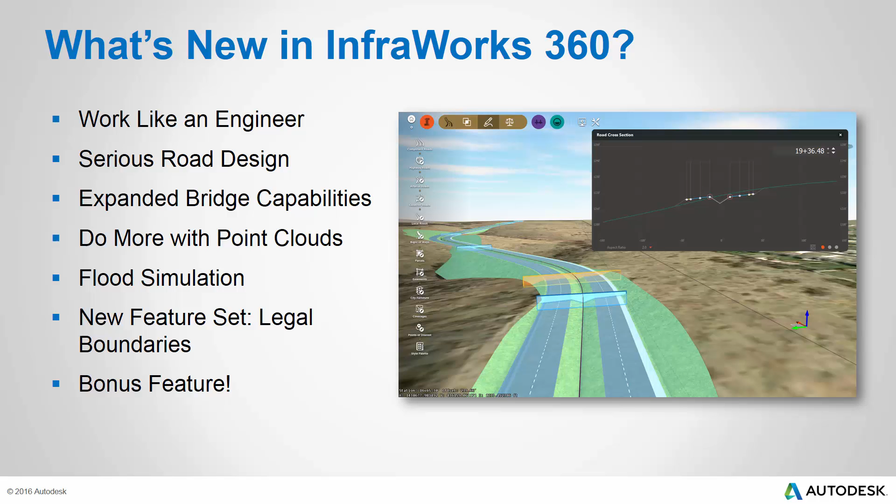Let's jump into how this new release of InfraWorks 360 lets you work like an engineer more than ever before. The newly released views allow you to easily control what you see and how you see it. Out of the box, the software comes with two built-in views: conceptual and engineering.

You can see how these samples are built so that the conceptual view is much more visually stunning with real materials and animated clouds, whereas the engineering view is more simplistic and turns on features like surface opacity so I can see beneath the ground to the bridge substructure.

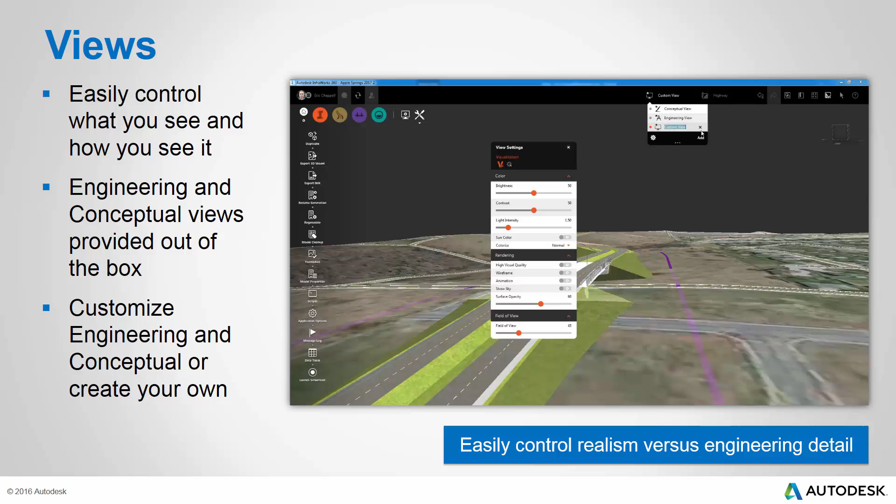Now I can completely customize these two views, and I can even add my own. For example, I can create one called wireframe and simply turn on the wireframe capability, and now I'm able to switch between three different views: conceptual, engineering, and wireframe.

Why is this feature important? It lets you easily control the realism of what you see versus the engineering detail you see at any given time.

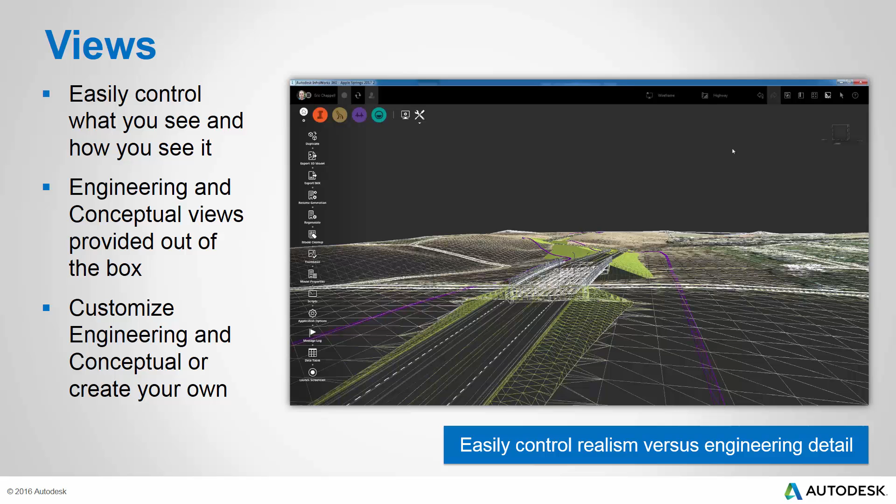With the new release of InfraWorks 360, showing contours is as easy as flipping a switch. When I click this area of interest and turn on the contour display, I immediately see the contours, and they reflect not only the GIS data representing my terrain, but also the design road cutting through it. They are, of course, dynamic.

If I make a change to the design of the road, for example lowering this PVI to change its elevation, I see that change reflected in the contours. I can also affect the interval of the contours. Currently they're set to 2 feet. I'll change them to 1, and just like that we see the new interval represented on screen.

Why is this feature important? It allows you to see the engineering detail in your design in the form of contours.

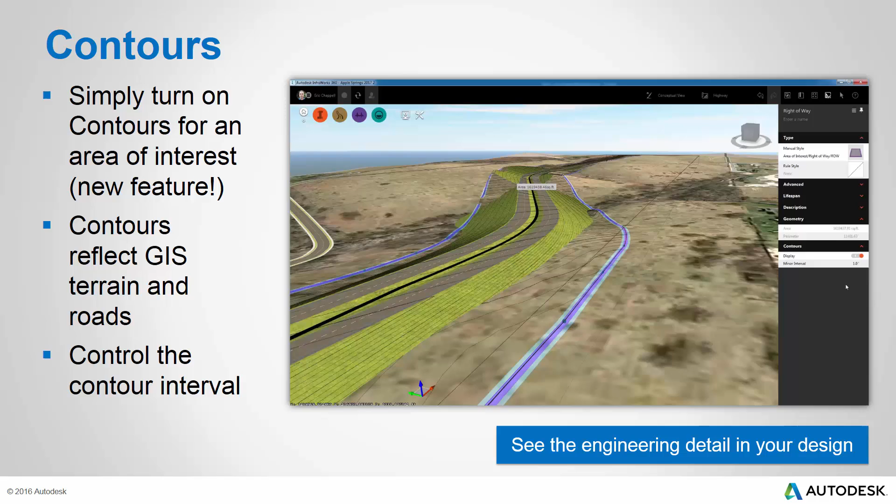With the new release of InfraWorks 360, you can easily view the cross-section of your road design. You can change the position where the cross-section is being viewed, and you can also pan and zoom within the cross-section window. The window itself has several different views, including super elevation view, road assembly view, and cut and fill view.

Here you can see as I move the slider from an area of cut to an area of fill, the section view window is providing information about the amount of cut or fill at any given point. You can also control the aspect ratio.

Why is this feature important? It allows you to see the engineering detail of your design in cross-section form.

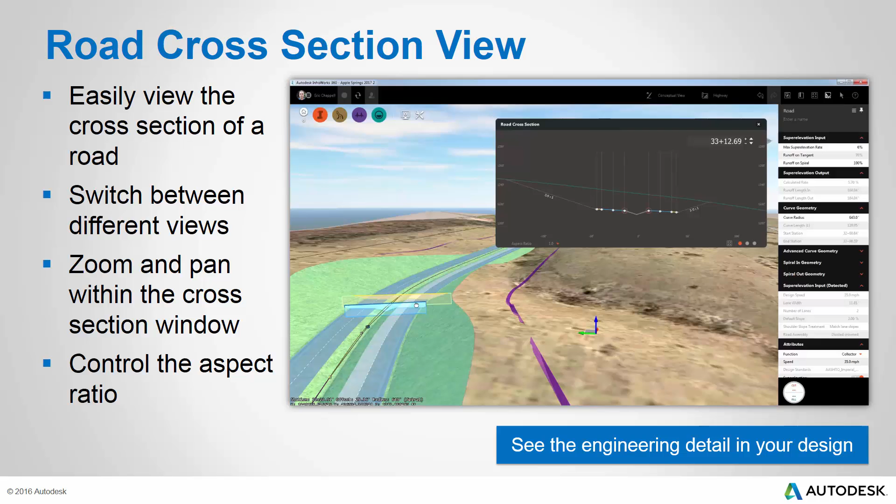With the new release of InfraWorks 360, you can calculate earthwork quantities at the click of a button. With a conveniently located earthwork quantity calculator in the bottom right corner of my screen, I can easily get cut and fill values for this road.

If I want to see detailed values, I can bring them up on screen, or I can export them to a report. Settings allow me to control the station increment and whether or not sampling takes place at key stations.

And of course, if I make a change to the road, it's very easy to recalculate my cut and fill quantities, so I can easily work toward achieving a balance or whatever my earthwork quantity goals are.

Why is this important? It allows me to easily assess the cost impact of my design as I work.

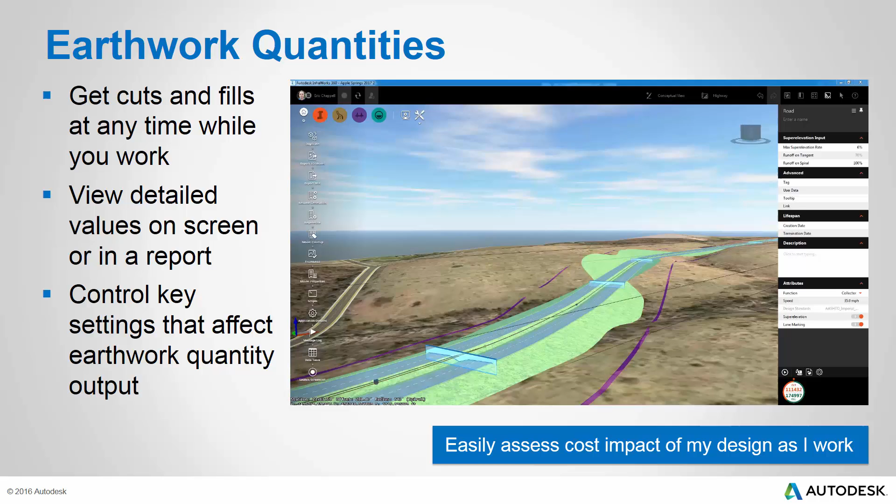With the new release of InfraWorks 360, you can easily configure the units that are applied when you get important information from your model. You can control the unit and precision for many types of values.

Notice how each value in the model is respecting the unit and precision settings that I adjusted just a moment ago in the unit configuration dialog.

You can easily switch between imperial and metric, and your configuration is stored for each unit system. This is important because it allows you to get each value you need in a practical and efficient form.

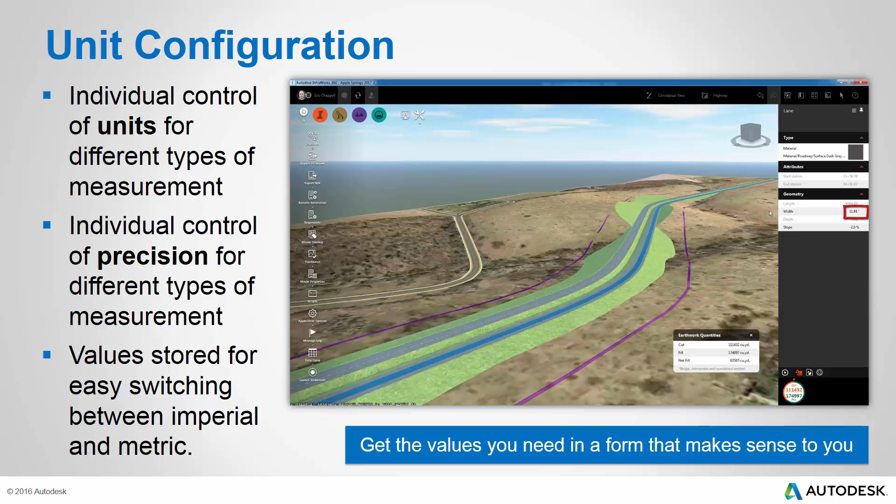Now let's take a look at how this new release of InfraWorks 360 allows you to do some serious road design. You can build roads using smart components like lanes, curbs, and sidewalks. Each of these components can be configured independently, as is being done with the sidewalk in the current example.

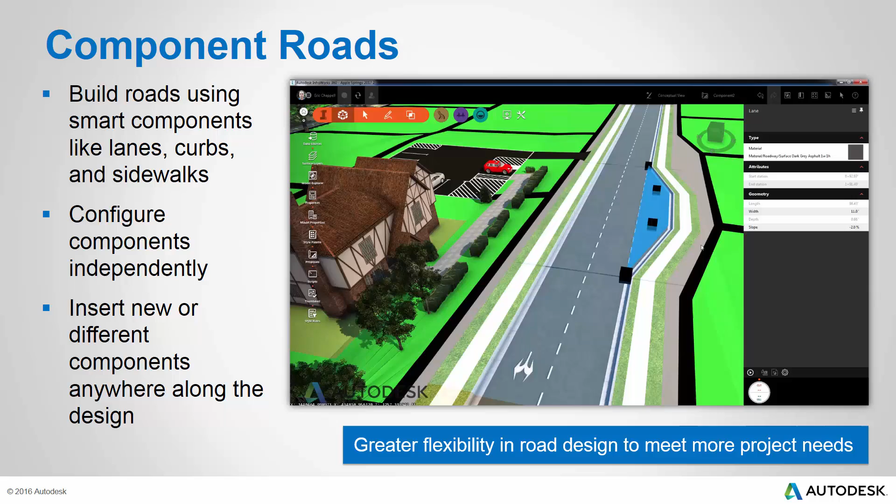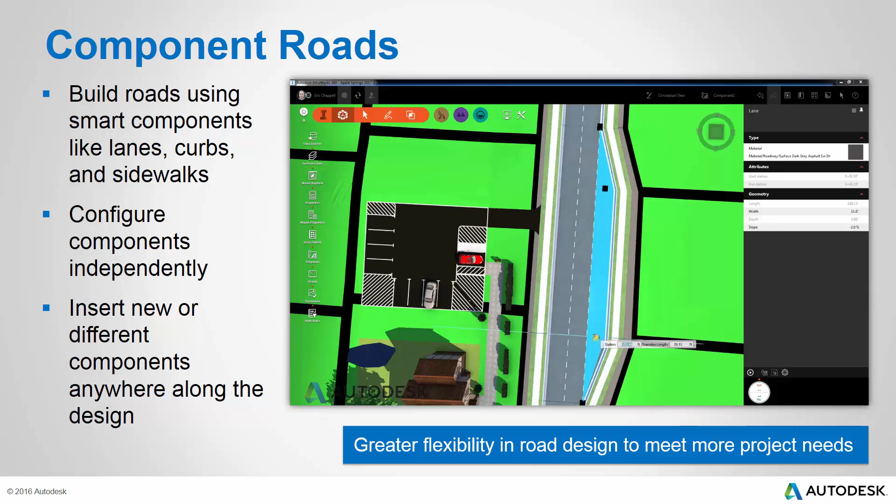You can also insert new or different components anywhere along the design. Watch as we insert a new lane component to create a bus pull-off to serve our residential development. Not only can we add the extra lane, but we can also configure its geometry and other properties to fit our project. We add a bus for a little bit of realism, and just like that we've got a modification to our design that includes the bus pull-off.

Why is this important? It allows you greater flexibility in your road design to meet more project needs.

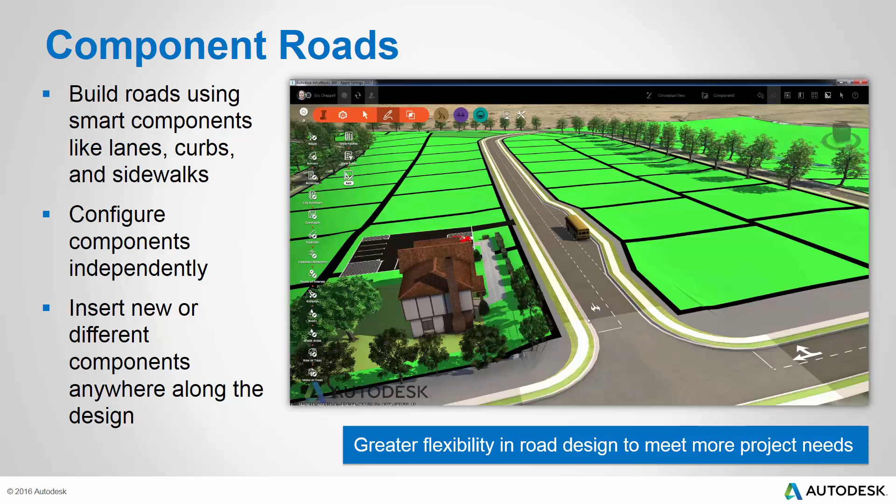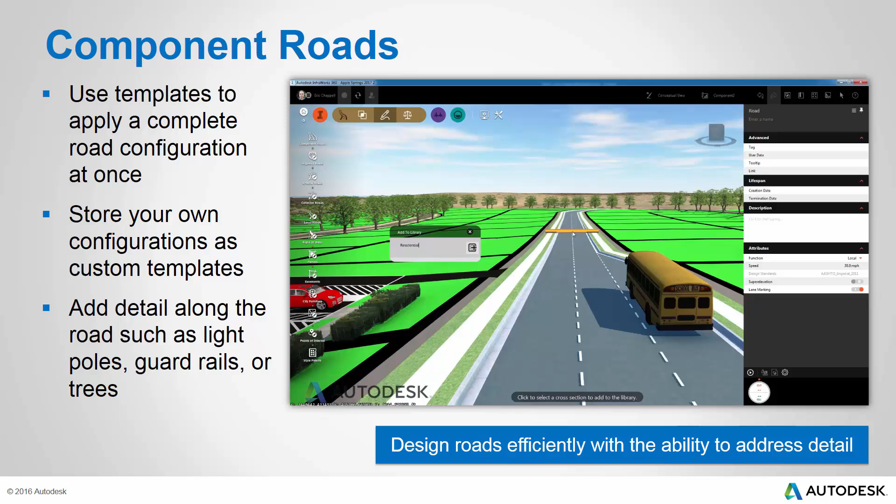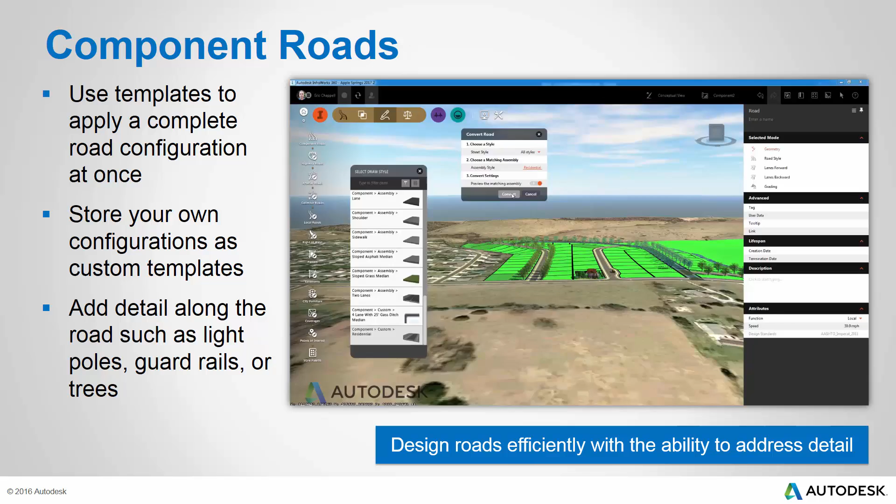Let's take a look at some other things you can do with component roads. You can use templates to apply a complete road configuration at once. Watch as we take the current road configuration and store it as a template in the library, then apply it to another road in the same project. We do this by converting the style-based road to a component road and choosing the component road template we'd like to apply. In just a few seconds, we've converted this road to a component road, and it also has the components and configuration of the road we were designing just a few minutes ago.

Next, we'll take this road and add some detail by providing trees along the right side. Note this could be anything - trees, obviously, but also light poles, guardrails, or anything you have access to in the form of a 3D model. Why are these capabilities important? They allow you to design roads not only efficiently, but also with the ability to address detail.

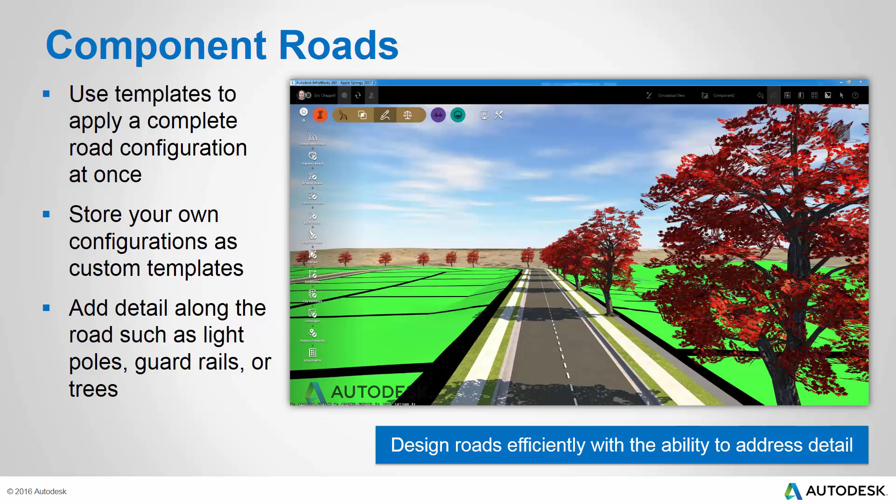With the new release of InfraWorks 360, you can add roadside grading to your road designs. I'll start by changing the grading method from fixed width to fixed slope. You'll see now that InfraWorks 360 is providing a 3-to-1 constant slope on both sides of the road. I can also click one side or the other and have settings that apply to just that side - for example, I could change the cut and fill slopes to 50% for this side of the road.

Perhaps the reason I'm able to do that is because I'm applying a more stable material on this side of the road, which I'll represent by changing the material applied to the side slope. So here you can see an independent application of not only the slope but also the material, different on the right side of the road than on the left.

Why are these capabilities important? They allow you greater flexibility in your road design to meet more project needs.

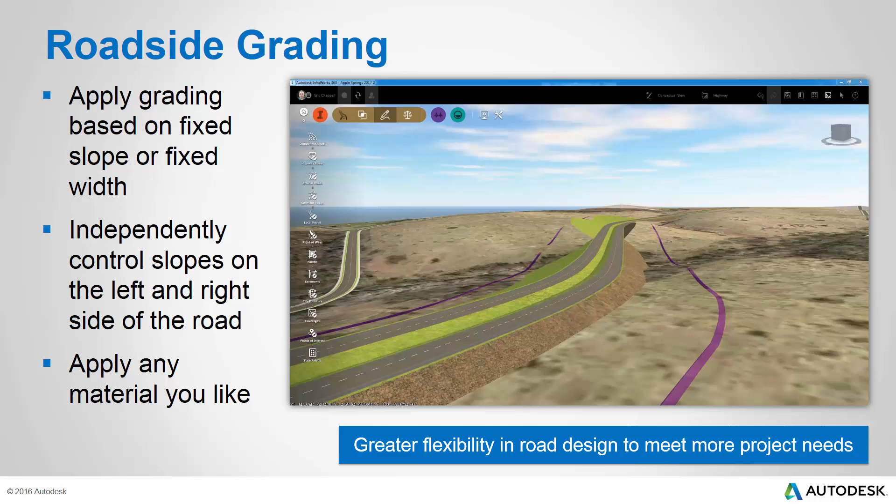With the new release of InfraWorks 360, applying super elevation is as easy as flipping a switch. I'll turn on super elevation for this road, and once the calculations have been applied, I can see by looking at the cross-section view that I now have super elevation applied to my road. Not only that, the on-screen graphics help me understand what's going on. I have section markers at key stations, and colored banding that shows the runout and runoff area associated with the super elevation calculations.

Most of this is based on a built-in design standard, but I can also go into the contextual stack and change key values such as the maximum super elevation rate or the amount of runoff that takes place in the spiral. Why is this important? It allows more advanced capabilities to meet more project needs when it comes to road design.

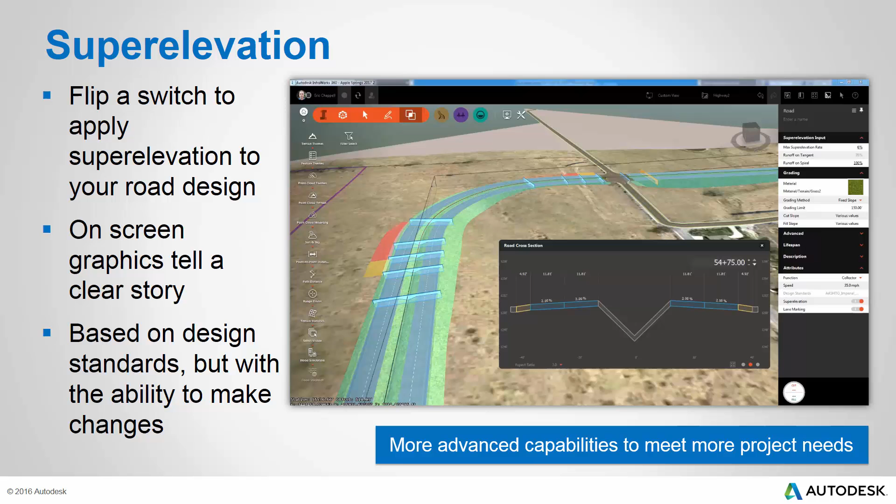InfraWorks 360 has the ability to automatically create a pavement drainage network for your road design. In this new release, it's able to understand the complex geometry offered by component roads. Looking closely at the automatically laid out drainage system, it's smart enough to recognize that inlets need to switch from the outside to the inside because we're entering a super elevated curve, where the inner curb becomes the downstream side. Inlets have also been placed in the swale running down the median of the road. This is important because it allows more advanced capabilities to meet more project needs.

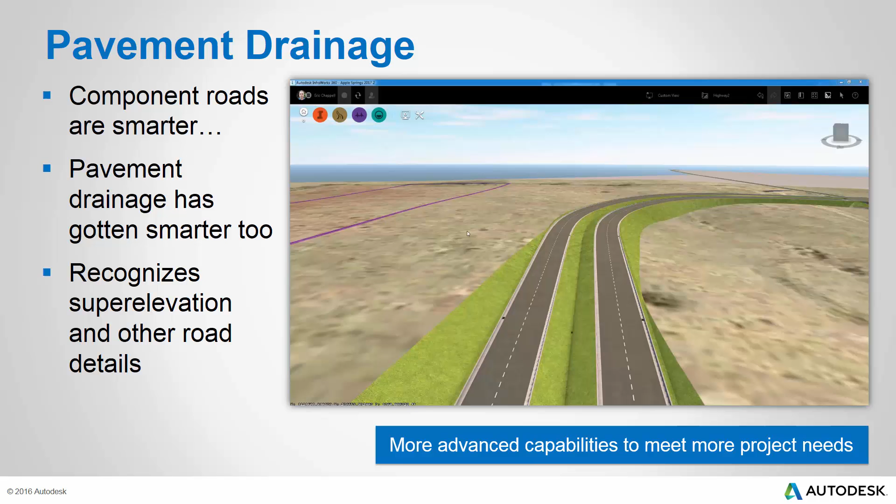Let's take a look at how you can do more than ever with bridge design and analysis in InfraWorks 360. Bridges in this release have a sophistication that matches the component roads. Watch as I create a bridge on this complex cross-section, and the bridge recognizes the complex geometry of the component road, including the divided 4-lane road, the sloped grass median, and so on. Next, I can replace the geometry of the bridge with a different assembly, and it still matches the complex configuration of the component road.

Something interesting to note is that this bridge respects not only the complex geometry of the component road, but also the super elevation applied to the road. As you can see, the lanes are super elevated on the bridge to match the road. So bridges are able to recognize and handle the complex geometry offered by component roads and super elevation.

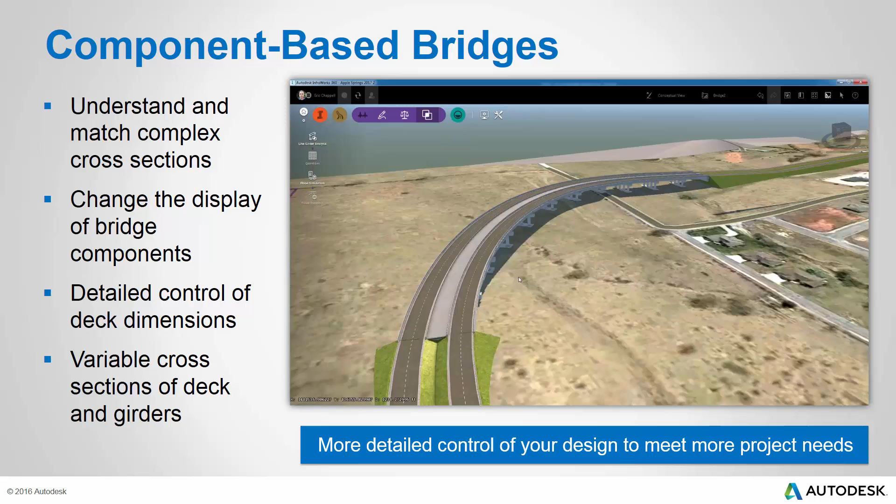Now let's look at the bridge itself, which is in some ways a component-based design also. If I click the bridge, I have the ability to go into component display, where I can turn on or off different major components of the bridge, such as the road, deck, girders, and so on. I'm going to limit my view to simply the deck and the girders, and when I click the bridge to select it, my display is limited to the components I want to see.

Another aspect of this component behavior is that we can edit certain components of the bridge in a very detailed fashion. For example, I can click the deck and change values on it, such as the thickness, edge thickness, tapering, and so on. So the bridge deck behaves much like one of the components when dealing with component roads.

Another added benefit is that I can add additional cross sections. If I click this starting slice gizmo and then the plus sign, I can add a new slice at a different location. The dimensions of this slice can be independently controlled, so if I want to change the thickness—I'll use something dramatic here, 8 feet, so we can see it clearly—I can have a varying cross section throughout this component. There you can see the result of adding that additional slice.

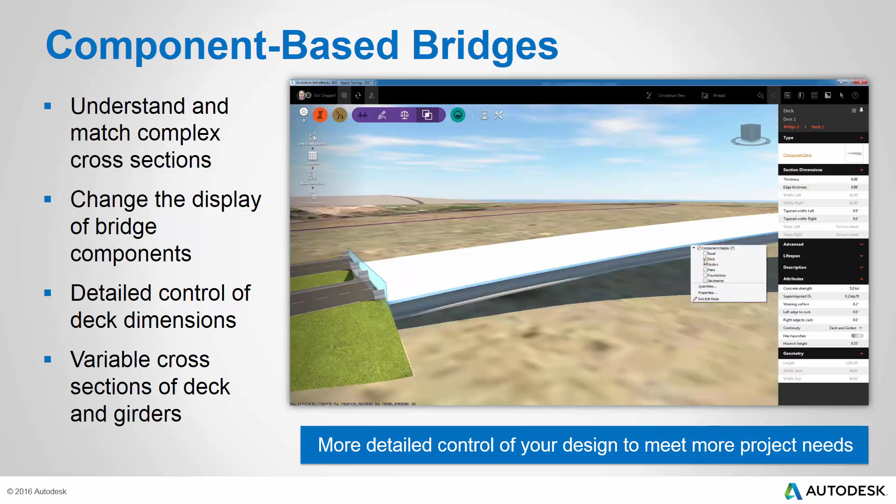I can click the slice and move it to a new location, and that transition point along the cross section of the component will move with it. I've got a similar capability with girders, so let's turn off the deck and turn on the girders. If I select a girder, I have the same capability to add an additional slice and change the dimensions for that point along the cross section of the component. So imagine the possibilities of modifying the cross-sectional geometry of the deck and girders on a bridge.

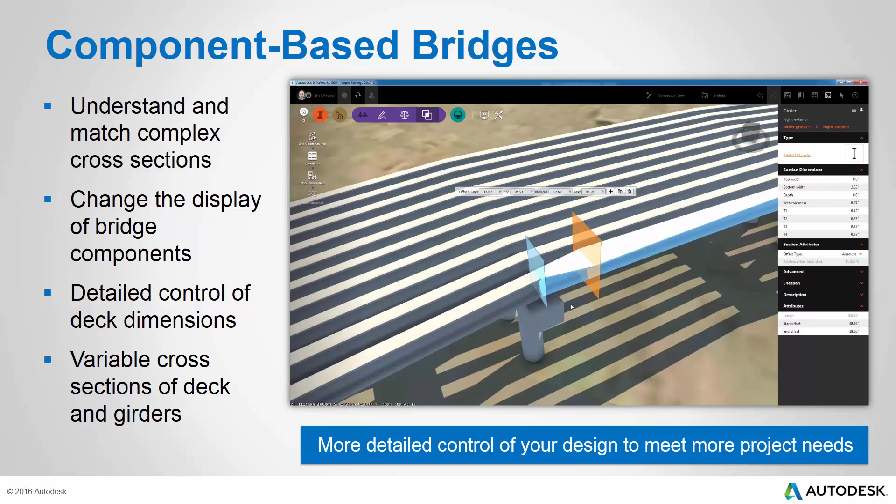So why are all these new bridge capabilities so important? They allow you more detailed control of your design to meet more project needs.

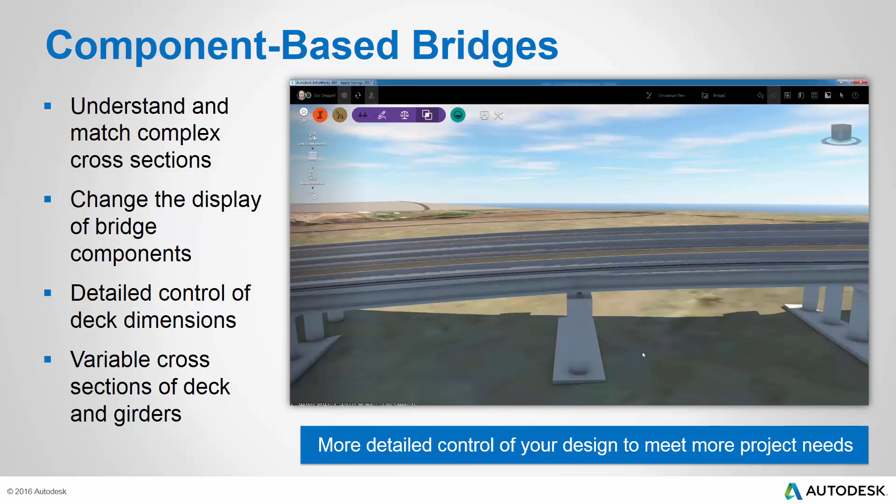With the new release of InfraWorks 360, you can verify the structural strength of bridge girders by performing a line girder analysis.

Now that the analysis is complete, I can click on individual girders within the model to view information about that girder. We can also see the color coding that's been applied to the girders, indicating the performance of the girders. Notice the girders in red indicating a problem with the girder design, corresponding with values that show up in red in the results. If I click one of the girders that is not color-coded, I see that none of the results end up in red, telling me that these particular girders have an acceptable design.

Now, if I want to get more detailed information about this girder analysis, I can click the Get Full Report button, which links me to a purchase dialog, which currently is free, so I can simply click Complete Purchase, and a detailed report will be produced for me. The report ends up on my desktop in the form of a PDF, and I can scroll through it, or I can navigate the table of contents to view the different information available in the report.

Finally, I can take this information and open it in Autodesk Structural Bridge Design to continue with the detailed design and documentation of my bridge. Why is this line girder analysis capability important? It allows you to go deeper into your bridge design so that you can get to detailed design faster.

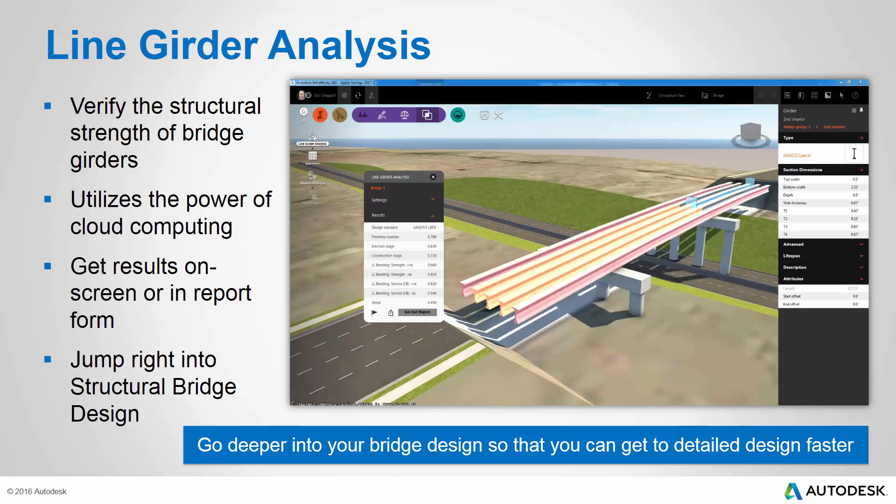Now let's take a look at how you can do more with point clouds in InfraWorks 360 than ever before. With the new release of InfraWorks 360, I can turn a point cloud into terrain data literally with the click of a button. InfraWorks 360 will analyze the point data in my model and use a series of settings to determine the best way to turn that point cloud not just into surface data, but also into vertical features like signs, light poles, trees, and other objects.

And this isn't just converting a point cloud into something else. It's also processing the point cloud and giving me options to export it as either its original form, a lightweight version, or one containing just the key points in the point cloud. And I can export this data either to another proposal in my model or even out to a separate RCS file somewhere on my hard drive.

I'll go ahead and click Start Processing, and once the process is complete, you'll see how the tool takes this very rough surface that I built from GIS data and turns it into something much more accurate based on the data stored within the point cloud. And not only that, it has set the stage for me to begin extracting objects from this point cloud, such as light poles, signs, and trees. Why is it important to be able to extract terrain data from point cloud data? It allows me to make practical use of my point cloud data to establish accurate existing conditions.

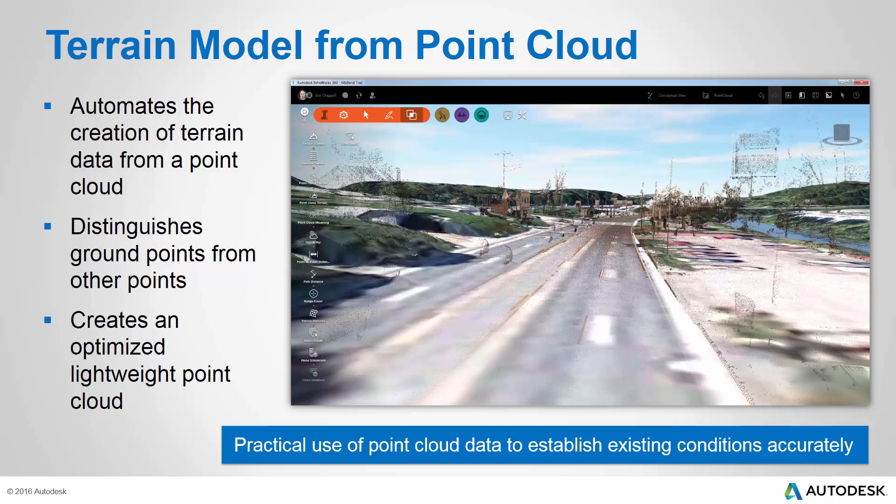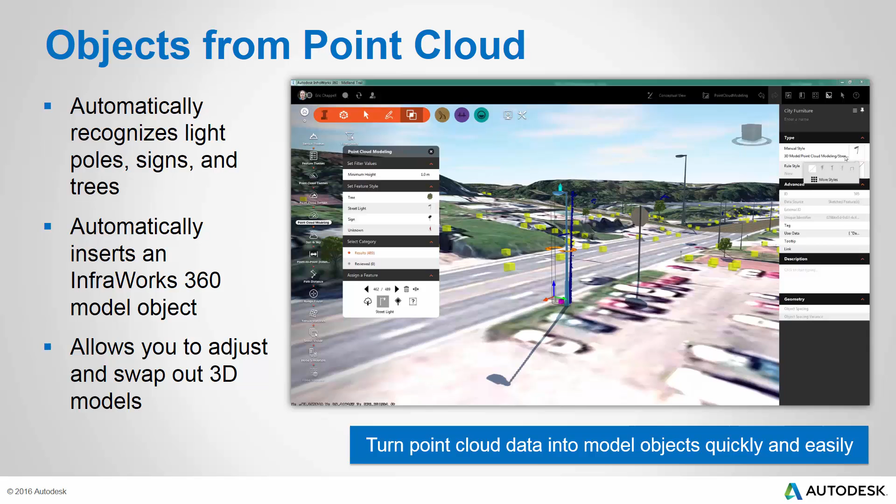The new release of InfraWorks 360 will automatically recognize objects in the point cloud data that I've brought into the model. All I need to do is click a button, and InfraWorks 360 will automatically pick out these objects and insert model objects in their place. Not only that, I have the flexibility to adjust whatever InfraWorks 360 has done for me.

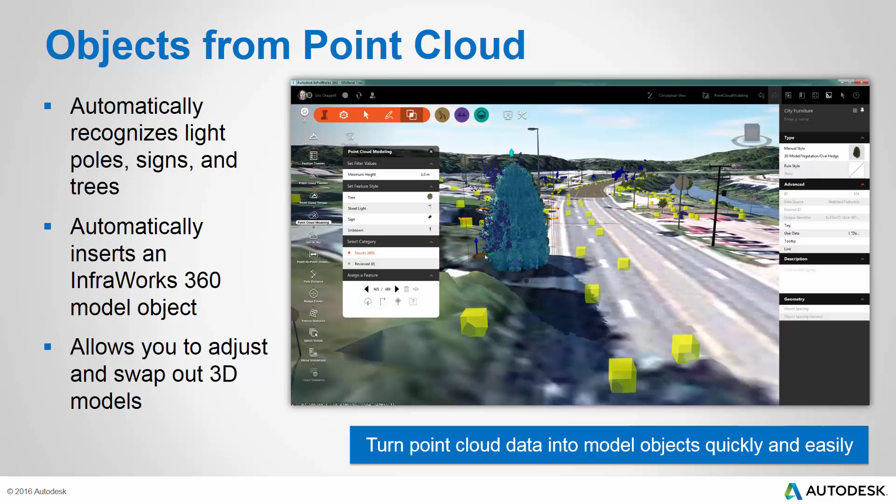For example, in the sample file in front of you, we've taken two light poles and swapped them out with power poles, which are the correct representation for those objects in the model. And you can see how easy it is to switch out the different objects and to make adjustments to their size and shape so that we can accurately match the point cloud. Why is this important? It allows you to turn point cloud data into model objects quickly and easily.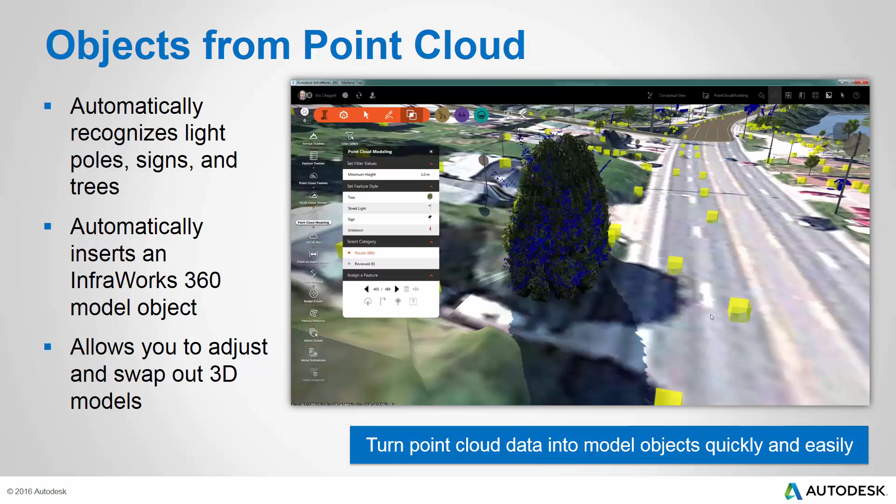Let's take a look now at a new feature set in InfraWorks 360, Areas of Interest. As you're about to see, these are great tools to use to represent legal boundaries in your model. With the new release of InfraWorks 360, you can use areas of interest to represent parcels, easements, and right-of-ways. And you can do this by drawing them in the model or by importing data. To show you how to draw in the model, I'll show you a handy tool for creating right-of-ways.

When I launch the tool, I'm given a few options as to how to create them, and the most useful one is road offset if I've got design roads in the model. Now what I'll do here is say that I want the same offset on both sides and that value is 25 feet on either side. Now it's just a matter of double clicking the design road, and just like that I've got a right-of-way in

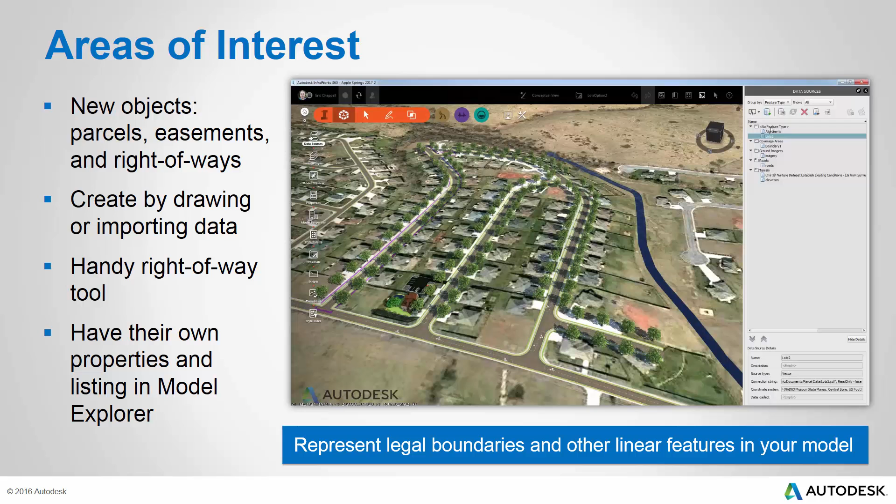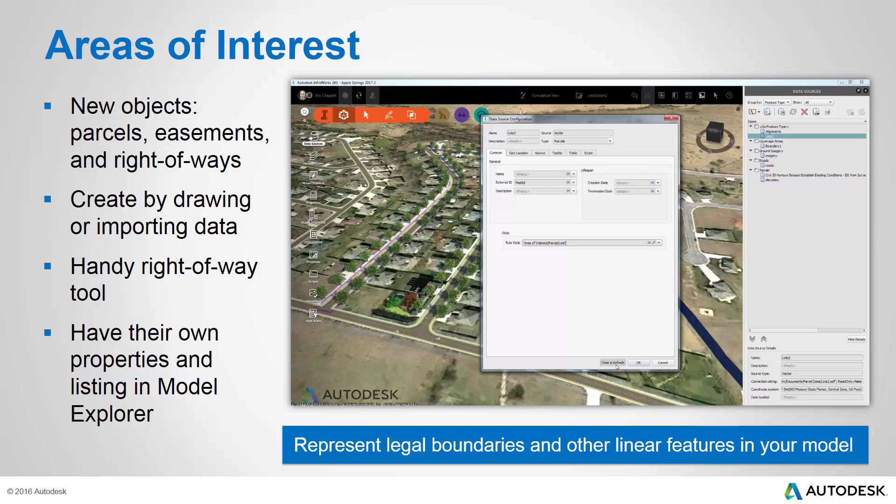the drawing. Now as I mentioned, you can also import data into these different object types. To do that, I'll go to the Data Sources command and add some SDF data. And you'll notice when I configure the data, I now have the choice of parcels, easements, or right-of-ways. For this particular data set, I'm going to use parcels, and I'll use a style that shows the parcels in a nice dark blue color. And just like that, I've got parcel data and right-of-way data in my model.

Not only can I represent these items in my model, but they also have separate object types, which means they show up separately in Model Explorer and they have their own properties. So for example, I can click this right-of-way and see its area and perimeter. I can also use Model Explorer to turn off the parcels and then turn off the right-of-ways as well. So why is this important? It allows you to represent legal boundaries and other linear features in your model.

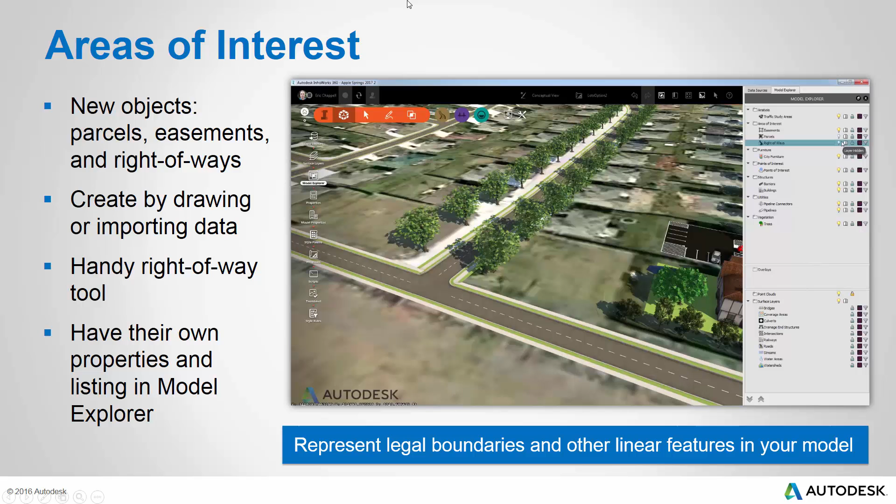Next, let's take a look at how flood analysis and simulation have become a part of this new release of InfraWorks 360. If you've got the latest release of InfraWorks 360 and Hydronia Riverflow 2D, you can run a flood analysis and simulation right in your InfraWorks 360 model. I'll start by defining the boundary that I'd like to study for my flood analysis. Then I'll define the inflow and outflow locations, and then provide the necessary values to run the flood analysis. I'll click Run Simulation,

and once the simulation is complete, I can play the simulation in the model, analyzing water surface elevation, depth, or velocity. Here we see a very visual and easy to understand animation of the change in water surface elevation over the 2-hour period, and then again with depth. And that's the beauty of this tool, how easy it makes it to communicate the flood analysis results to others.

I can pause and create a snapshot, and then restore that snapshot at a later time. This allows me to easily communicate the results of my flood analysis anytime I need to. Why is this capability important? It gives you the ability to perform a flood analysis on any one of your projects quickly and easily.

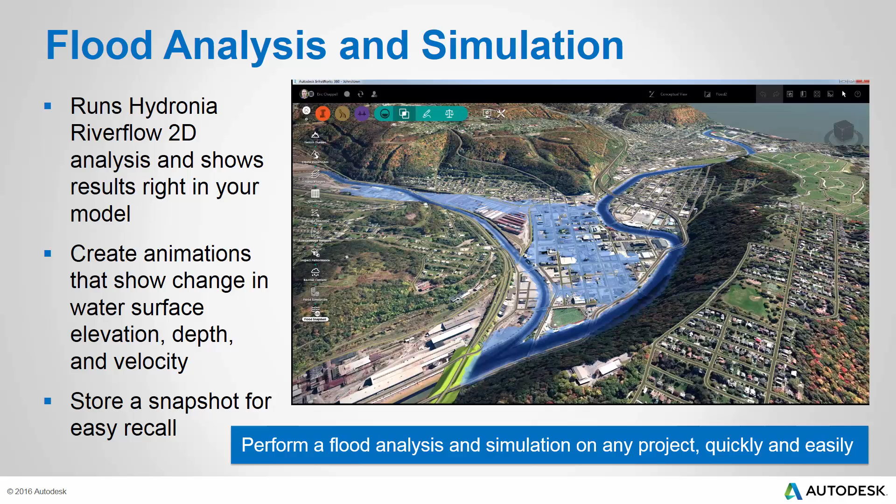As promised, I'm happy to announce a bonus feature in InfraWorks 360, recently used styles. The new release of InfraWorks 360 saves you time by always remembering the last few styles that you've used. Let's see how it works. I'm going to click this car and change the style of it to, say, a taxi. Then when I go to change the style of the car nearby, that taxi style is remembered and placed in this list of most recent styles. So now I don't have to browse for it to find it once again.

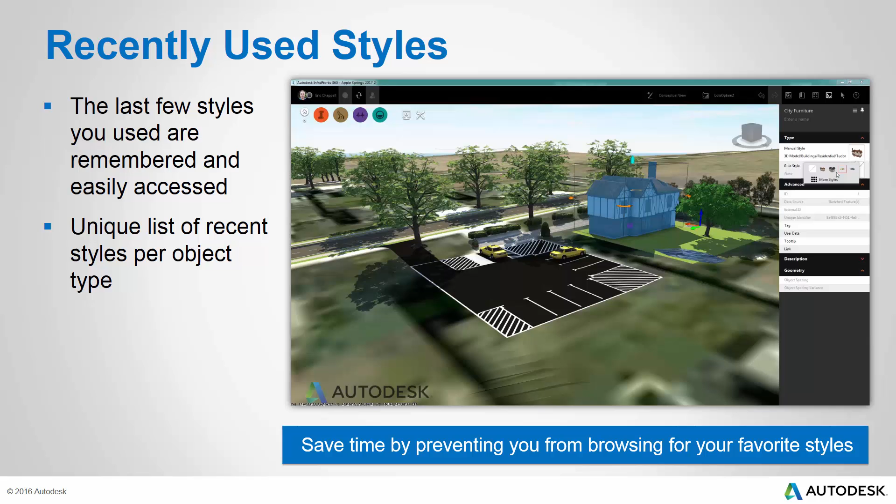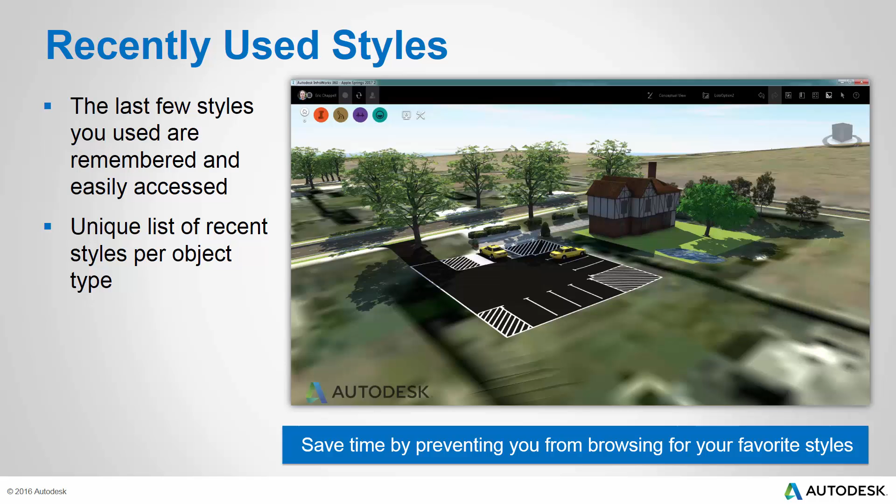Let's see how it works using this house as an example. I'm going to change the style of the house to this 2-story stucco, and then I'll change it back again to the Tudor style that it was previously. Now when I click the style icon again, I see both of those styles listed under most recent styles. So why is this feature important? It saves you time by preventing you from having to browse for your favorite styles.